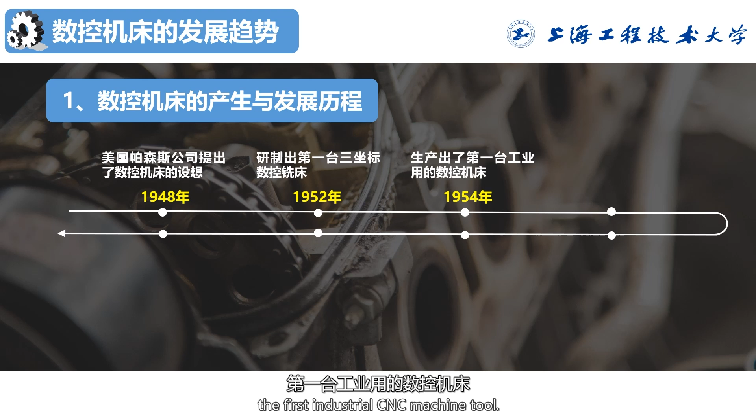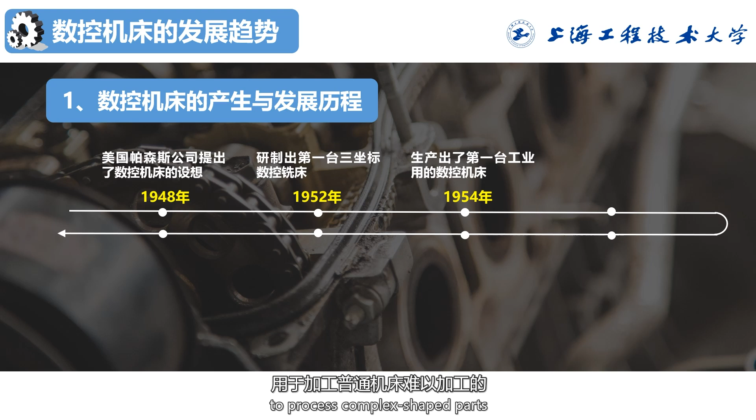In 1948, the Parsons Company of the United States proposed the concept of CNC machine tools while developing processing machines, and in 1952, developed the first three-coordinate CNC milling machine. By the end of 1954, the United States had produced the first industrial CNC machine tool. At that time, the control system used vacuum tubes, which were large in size and had high power consumption. They were only used in some military departments to process complex shaped parts that were difficult to machine with ordinary machine tools. This was the first generation of CNC systems.

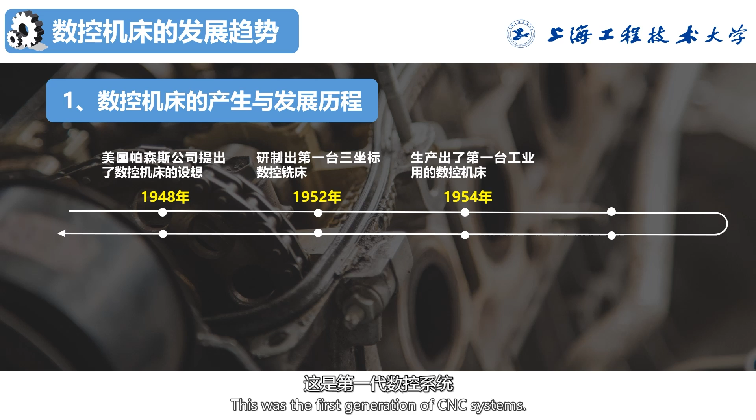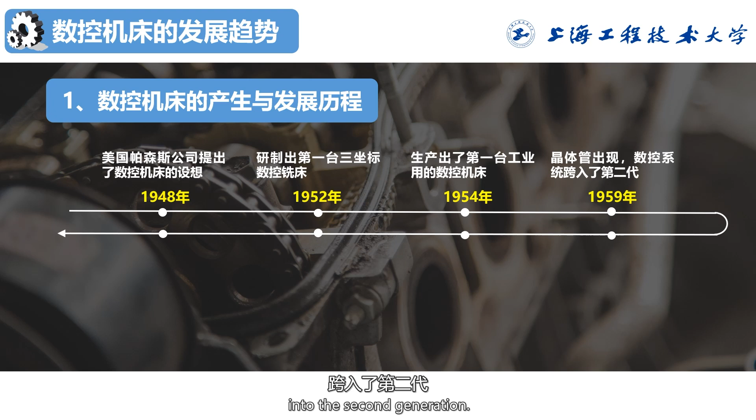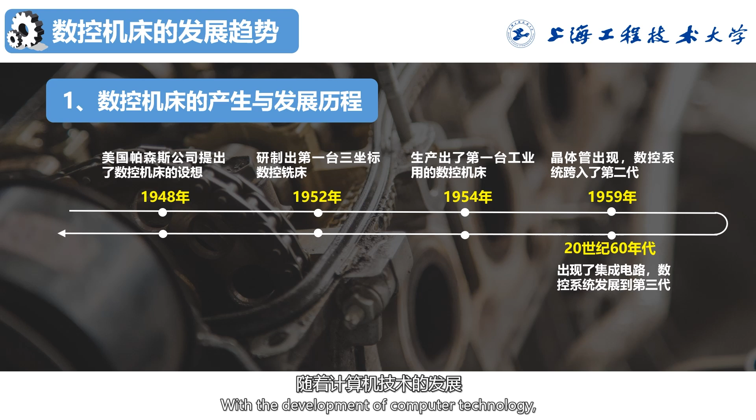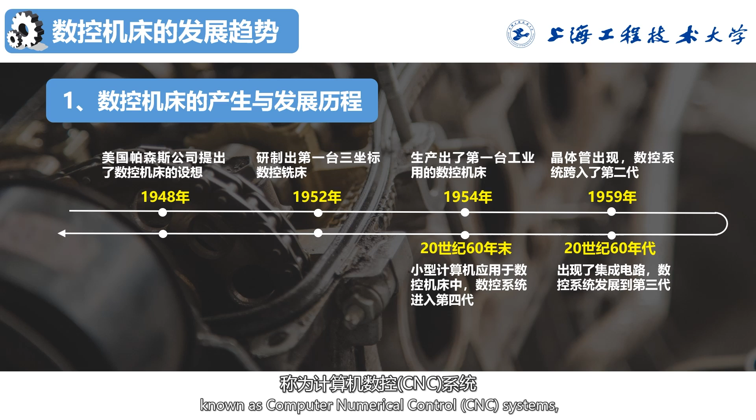In 1959, transistors appeared, and electronic computers began using transistor components and printed circuit boards, advancing CNC systems into the second generation. In the 1960s, integrated circuits emerged, and CNC systems evolved into the third generation. With the development of computer technology, minicomputers were applied to CNC machine tools, resulting in systems known as computer numerical control CNC systems, entering the fourth generation. In the early 1970s, microprocessors emerged, and CNC systems centered on microprocessors became known as fifth-generation CNC systems.

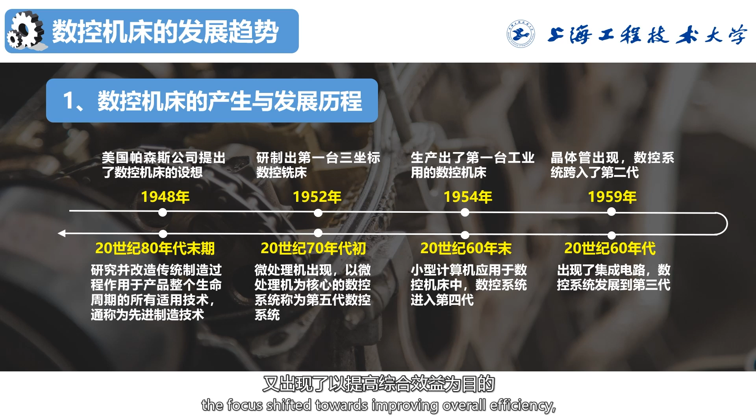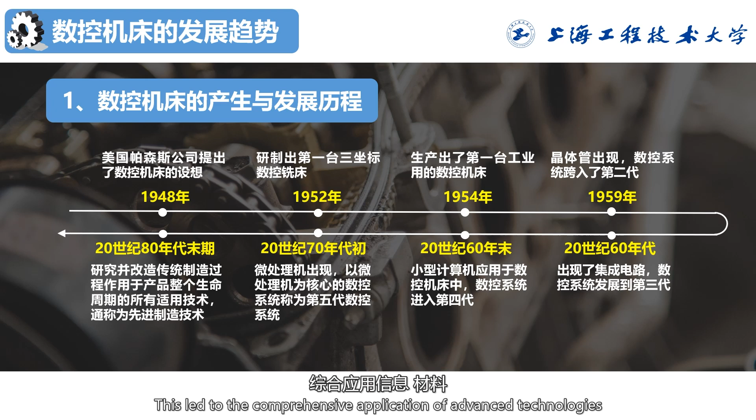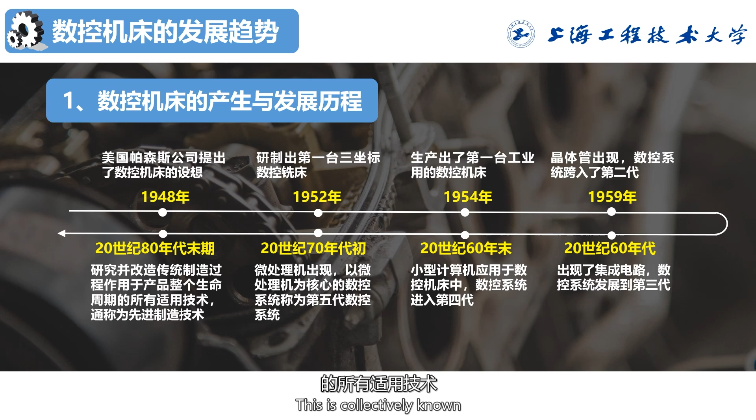Since then, the era of rapid development of CNC machine tools began. In the late 1980s, the focus shifted towards improving overall efficiency, with humans as the central focus, supported by computer technology. This led to the comprehensive application of advanced technologies in information, materials, energy, and environment, as well as modern system management techniques, aimed at researching and transforming traditional manufacturing processes to cover the entire product life cycle. This is collectively known as advanced manufacturing technology.

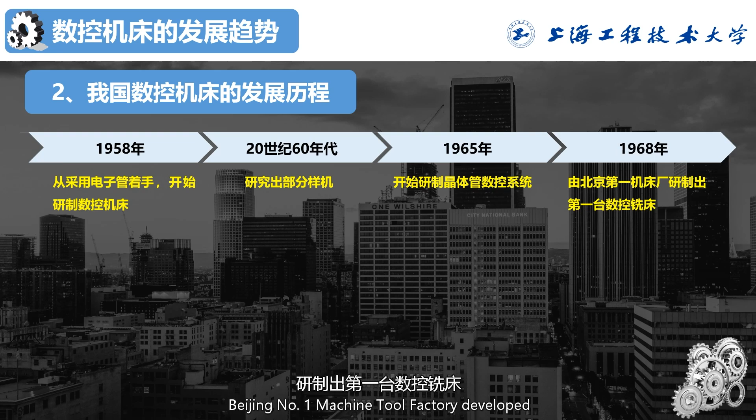China's CNC machine tools have developed from scratch and have now become the world's largest consumer and producer of machine tools. China began developing CNC machine tools in 1958, starting with the use of vacuum tubes. In the 1960s, some prototypes were developed, and in 1965, work began on transistor-based CNC systems. In 1968, Beijing No. 1 Machine Tool Factory developed the first CNC milling machine.

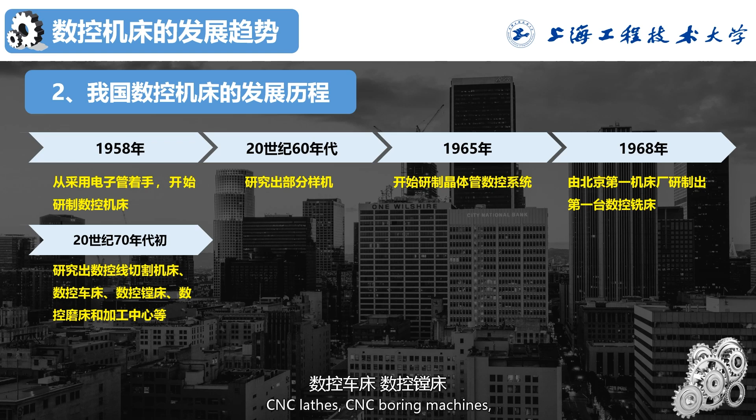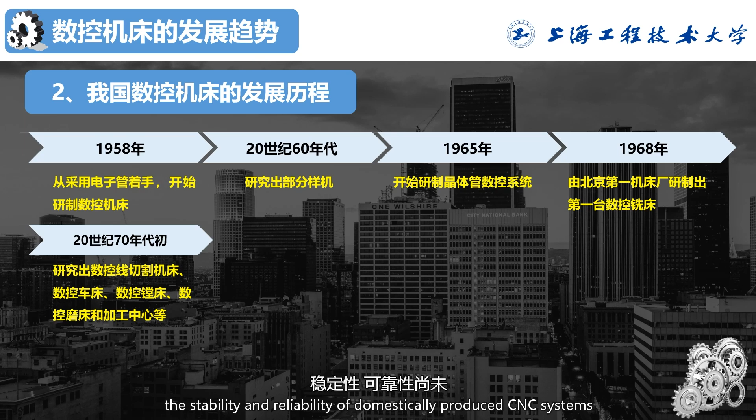By the early 1970s, CNC wire cutting machines, CNC lathes, CNC boring machines, CNC grinding machines, and machining centers were also developed. During this period, the stability and reliability of domestically produced CNC systems were not well resolved, which limited the development of domestic CNC machine tools.

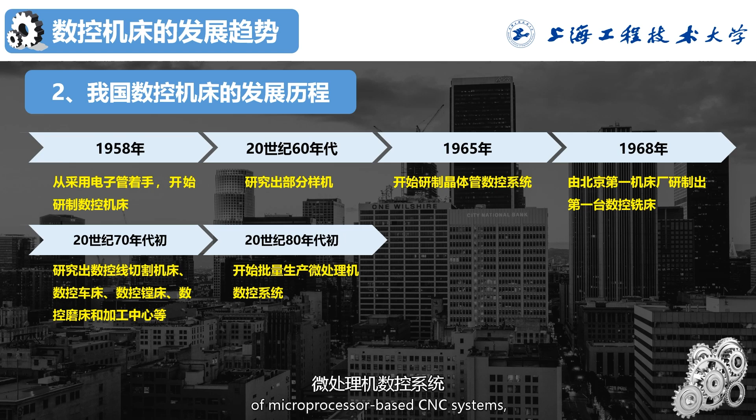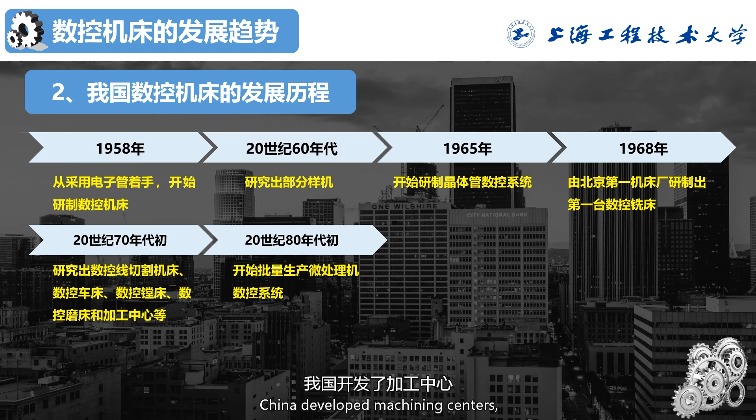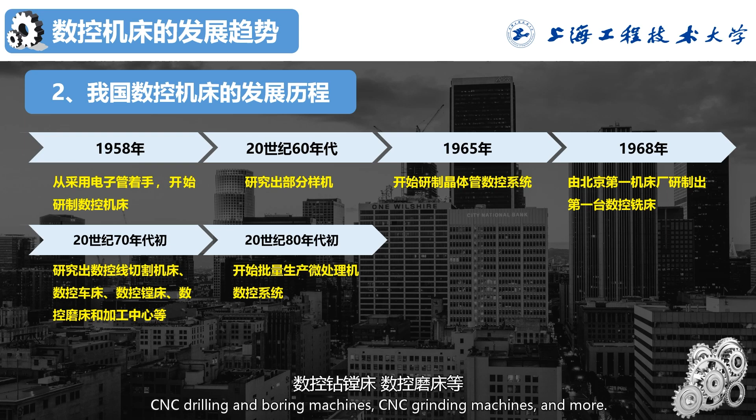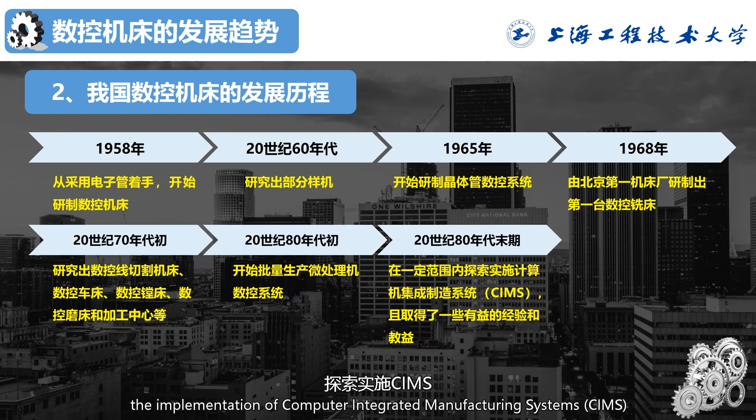In the early 1980s, with the implementation of the reform and opening up policy, China introduced technology from abroad and began mass production of microprocessor-based CNC systems, spurring a new wave of development in China's CNC machine tools. China developed machining centers, CNC lathes, CNC milling machines, CNC drilling and boring machines, CNC grinding machines, and more. In the late 1980s, China also explored the implementation of computer-integrated manufacturing systems, CIMS, within a certain scope and gained some valuable experience and benefits.

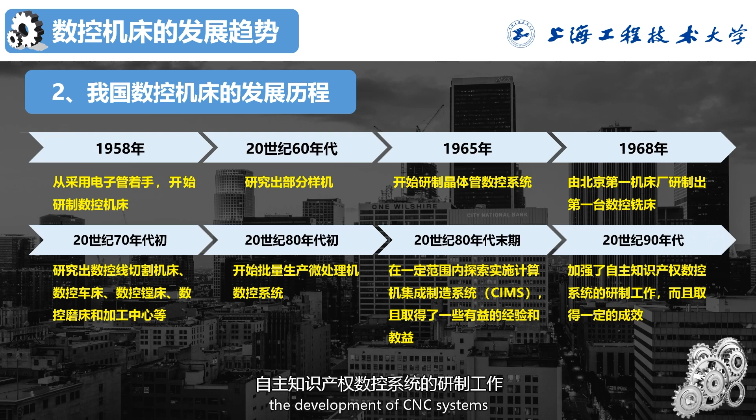China introduced the plan for adjustment and revitalization of the equipment manufacturing industry, launching the high-end CNC machine tools and basic manufacturing equipment major technological project, hereinafter referred to as the 04 project, which focuses on supporting the demand for high-end CNC machine tools and basic manufacturing equipment in the aerospace, automotive, shipbuilding, and power generation sectors. This project received key support.

The 04 project has played an important role in advancing the technology and industrial development of high-end CNC machine tools, accelerating the pace of research and development in high-end CNC machine tools, CNC systems, and functional components. It has facilitated the integration of machine tool enterprises with user companies in the aerospace, automotive, shipbuilding, and power generation fields.

A batch of high-end CNC machine tools, such as turn-mill compound machining centers, large gantry type 5-axis linkage machining centers, and multi-spindle milling mini machines, have been developed from scratch and successfully applied to actual production in key areas and major projects.

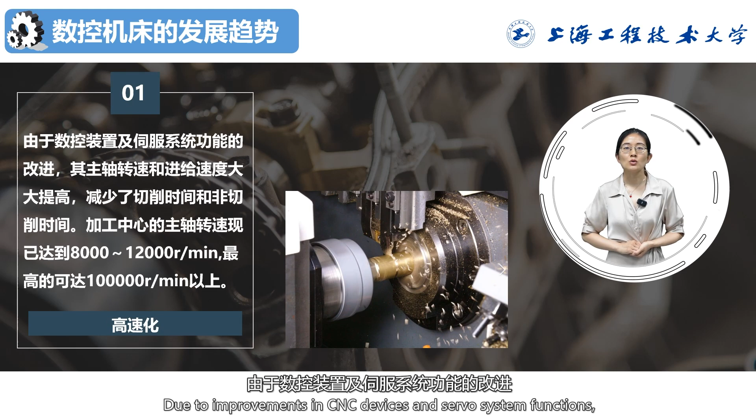Due to improvements in CNC devices and servo system functions, spindle speed and feed rate have significantly increased, reducing cutting time and non-cutting time. The spindle speed of machining centers has now reached 8,000 to 12,000 R per minute, with the highest exceeding 100,000 R per minute.

High-speed cutting refers to the cutting motion speed of the tool's cutting edge relative to the part surface, which exceeds the speed of conventional cutting by 5 to 10 times, as reflected in the spindle speed, feed rate, and calculation speed of CNC machine tools.

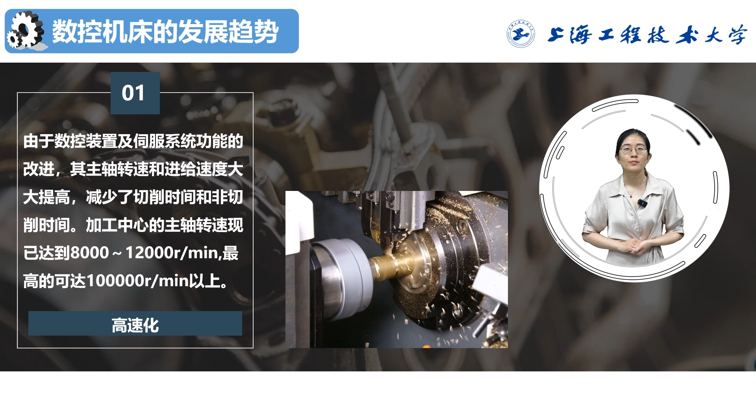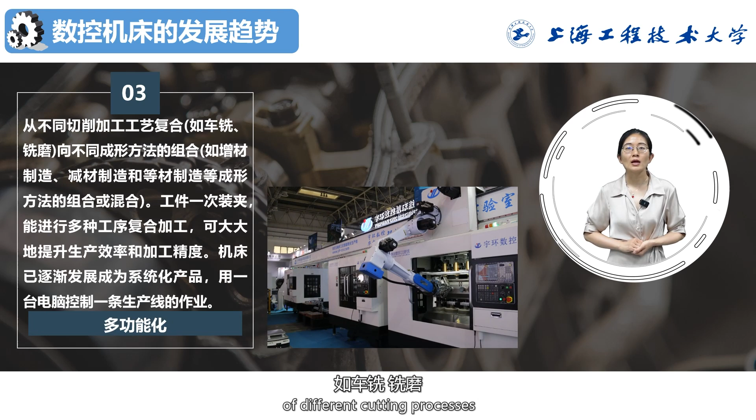The precision of CNC machine tools is mainly reflected in positioning accuracy and repeatability. CNC machine tools are equipped with new, high-speed, multifunctional CNC systems with resolutions reaching 0.1 micron, and some even reaching 0.01 micron. This allows for high-precision machining, and ultra-precision machining accuracy has begun to enter the nanometer level, 0.001 micron.

The trend is moving from the combination of different cutting processes, such as milling, turning, and grinding, to the combination of different forming methods, such as additive manufacturing, subtractive manufacturing, and equal-material manufacturing. Workpieces can undergo multiple process combinations in a single clamping, greatly enhancing production efficiency and machining accuracy.

Machine tools have gradually evolved into systematized products, where a single computer can control the operations of an entire production line.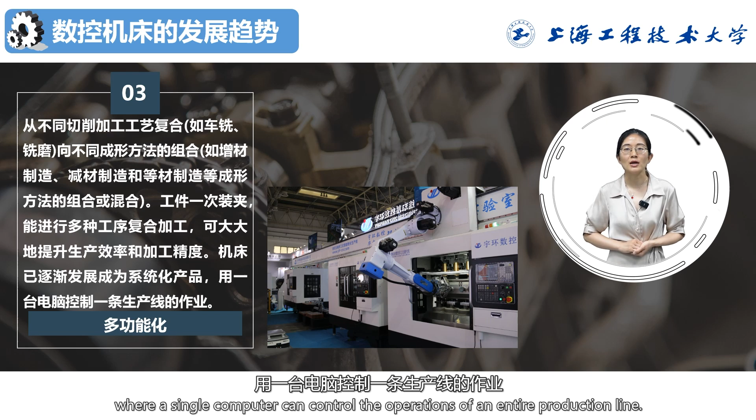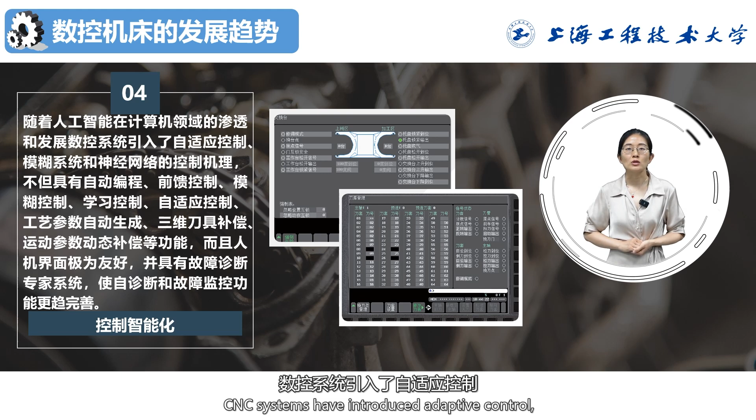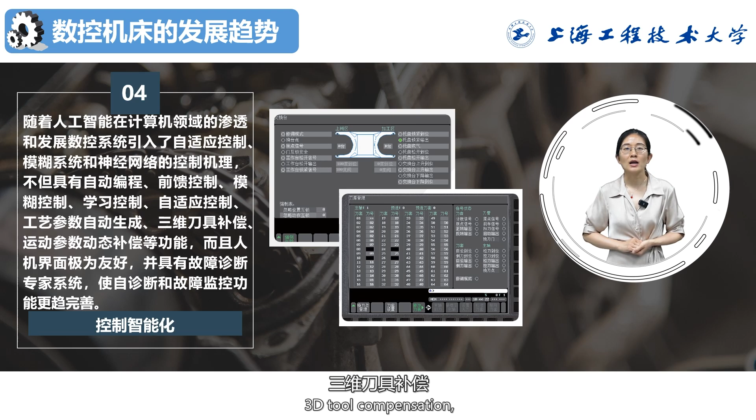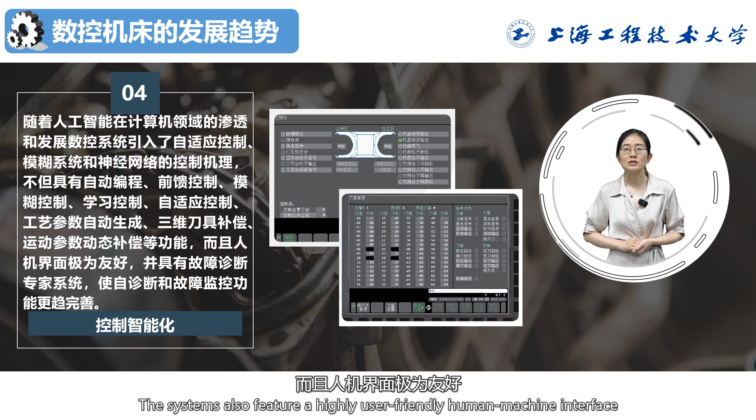With the penetration and development of artificial intelligence in the field of computers, CNC systems have introduced adaptive control, fuzzy systems, and neural network control mechanisms, offering functions such as automatic programming, feed-forward control, fuzzy control, learning control, adaptive control, automatic generation of process parameters, three-dimensional tool compensation, and dynamic compensation of motion parameters. The systems also feature a highly user-friendly human-machine interface and include expert systems for fault diagnosis, making self-diagnosis and fault monitoring functions more comprehensive.

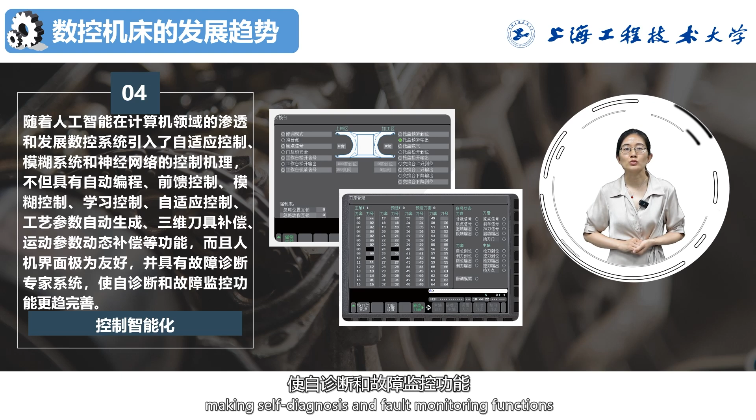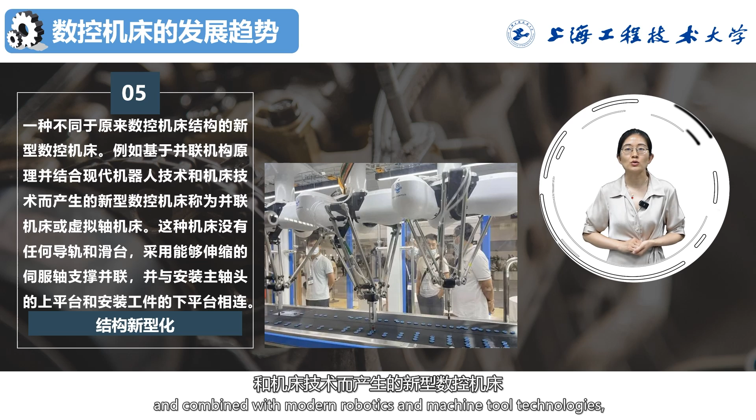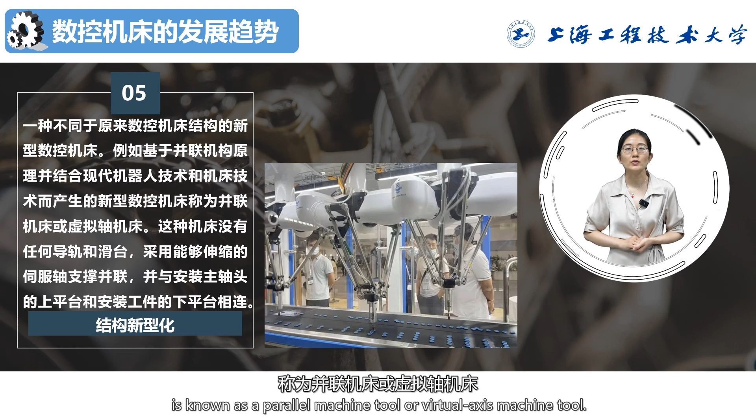Currently, a new type of CNC machine tool structure has emerged on the market, different from traditional CNC machine tools. For example, a new type of CNC machine tool based on the principle of parallel mechanisms and combined with modern robotics and machine tool technologies is known as a parallel machine tool or virtual axis machine tool. This machine tool has no guide rails or sliding tables. It uses extendable servo axes for parallel support and connects the upper platform with the spindle head and the lower platform with the workpiece.

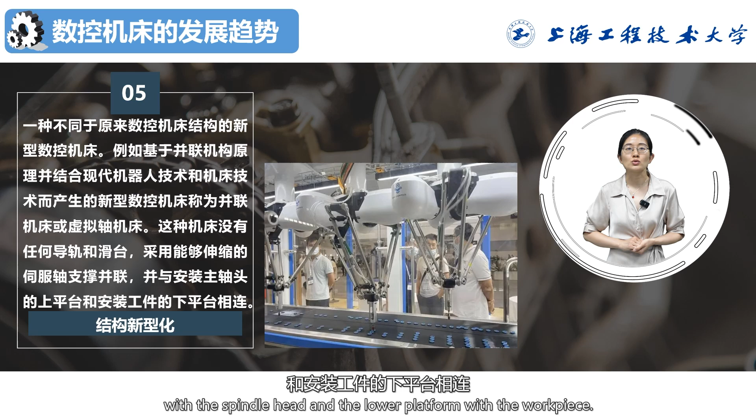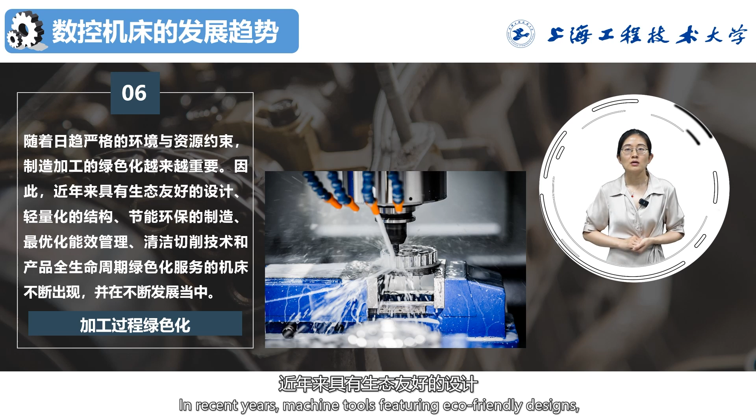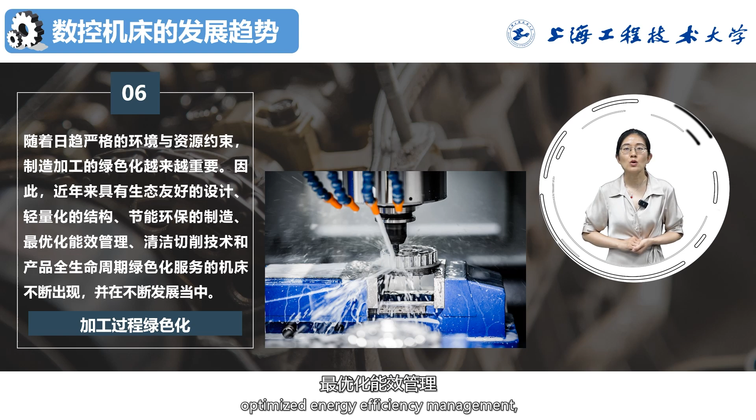With increasingly stringent environmental and resource constraints, green manufacturing is becoming increasingly important. In recent years, machine tools featuring eco-friendly designs, lightweight structures, energy-saving and environmentally friendly manufacturing, optimized energy efficiency management, clean cutting technologies, and green services throughout the product lifecycle have continuously emerged and are in ongoing development. These are the development trends of CNC machine tools.